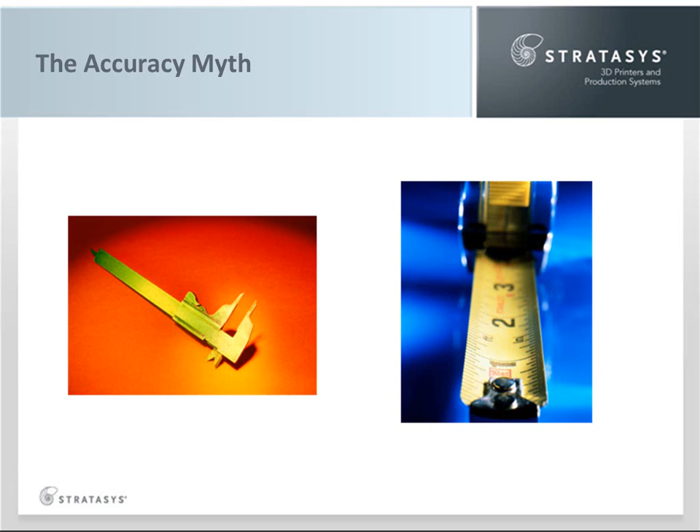Thank you, Fred. As Fred mentioned, I'm Bonnie Meyer. I've been an application engineer for 11 years. Speaking from experience, I've seen the accuracy myth in action more times than I can count. But myth may be a bit strong. Let's say accuracy misconception. The misconception is that accuracy can be determined through unrelated factors like resolution and layer thickness, and that additive manufacturing part quality is linked to appearance. I will spend a few moments today to correct the misconception, to dispel the myth and shed some light on the truth.

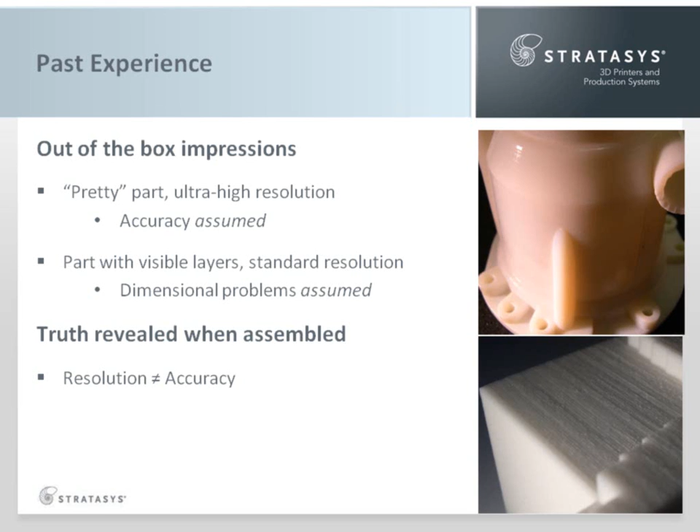A part with visible layers, throw the calipers on the part and start looking for dimensional inaccuracies, fully expecting to find that the part doesn't meet specifications. It's not until they assemble the parts they discover the true accuracy. They learn once again that appearance and resolution have little bearing on accuracy. If it did, the engineering scale on the right would be the more accurate of the two.

The accuracy of the ruler is directly related to how close the overall length is to the specified dimension, in this case 12 inches. The same is true in additive manufacturing. The accuracy of a part is a result of how close the part is to the specified dimension, not how many layers make up a given feature or distance.

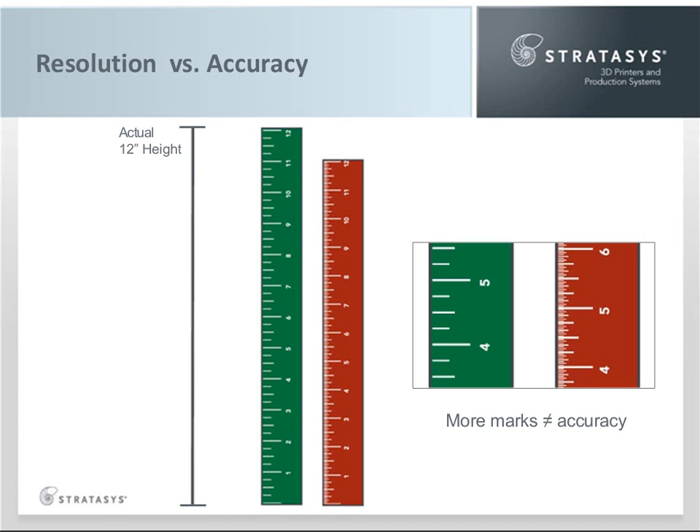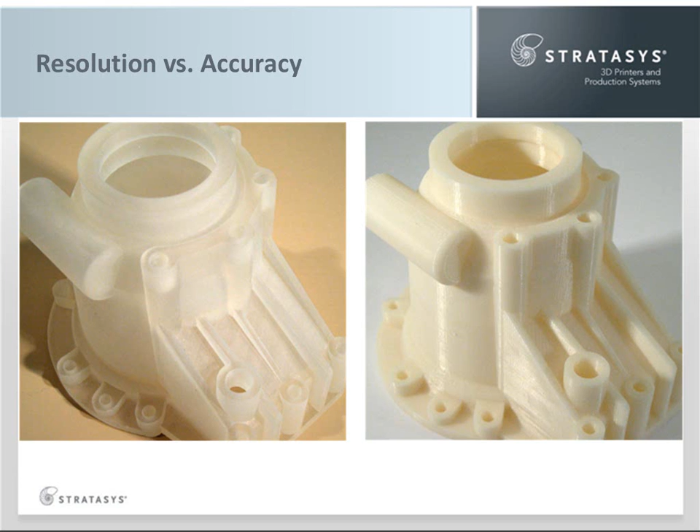To show the disconnect between accuracy and resolution in the additive manufacturing industry, consider these two parts. Which is more accurate, the one on the left or the one on the right? Let's take a closer look. It's impossible to tell, right? If we're honest with ourselves, we'd have to admit that we tend to let the myth stand. A little later, we'll see the answer.

The additive manufacturing industry is filled with accuracy claims. Many are unsubstantiated. Some will lead those that are misinformed to believe that 600 dpi XY resolution or a 5 thousandths of an inch spot size correlates to exceptional accuracy. This is simply not true, as I will prove with hard data from exhaustive analysis.

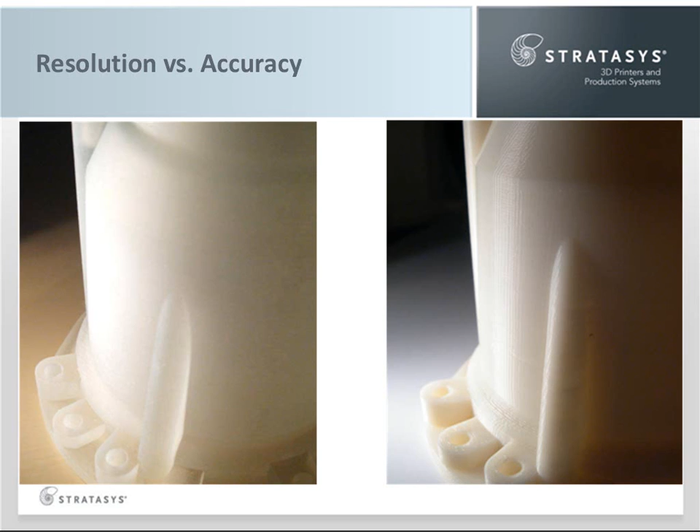Let's take a moment to do a quick overview of some terms. Resolution specifies the smallest feature that a system will reproduce. For additive manufacturing, there are two types of resolution. The first is in the XY plane. For a raster process, this is the space between droplets. For a vector process, it's the spot size, or the diameter of a laser beam or the extrusion. The second is in Z, or vertical axis. For all processes, this is the layer thickness.

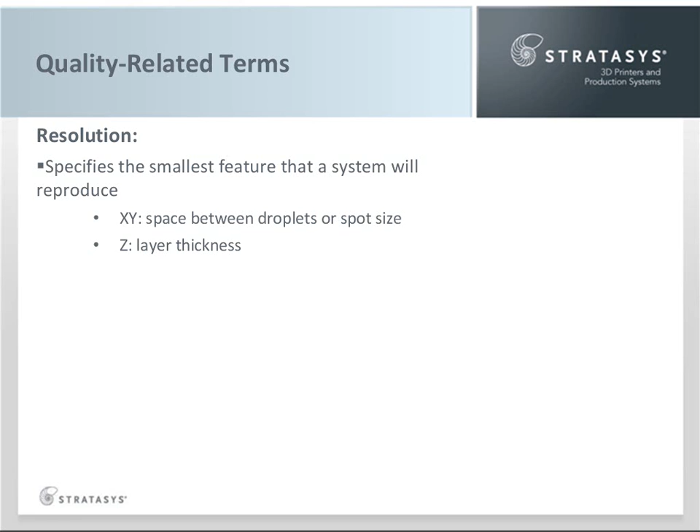Accuracy is how closely a part matches the intended dimensions. Precision is how closely the system gets to its target spot and is often confused with accuracy. And repeatability is the degree of variance between parts. Each of these factors may influence the quality of your additive manufacturing parts. However, resolution only influences accuracy if it results in features that are oversized or omitted.

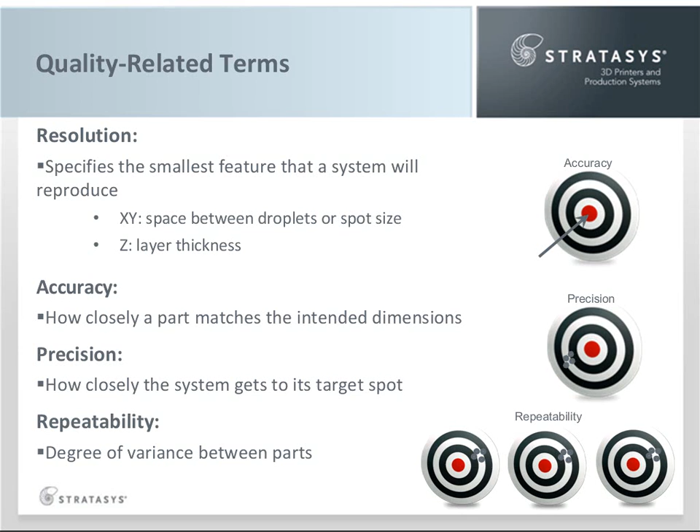And don't forget, quality is always in the context of the application. The application dictates which of these parameters define quality. And there's one other variable that's critical in assessing quality, and that's stability. Stability is the ability to maintain or hold accuracy over time. But we'll go into more of that later.

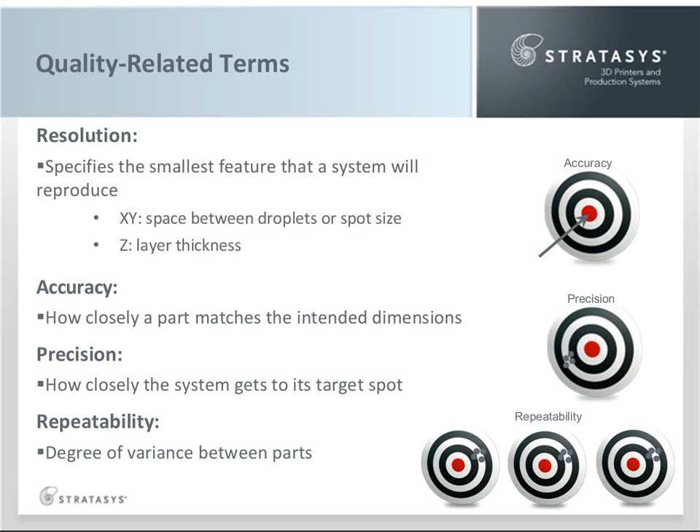So by no means am I discounting the value of resolution. There are applications where it's more important than accuracy, applications where quality is a function of resolution. A few that come to mind are show models, gorgeous pieces painted and decorated to look like a production part. Here, Z resolution or layer thickness can be a factor, for thinner layers produce smoother surfaces, which means less

post-processing. Fine-featured parts are found in jewelry. These are very detailed with fine features that demand a very high resolution, and also tooling or patterns. But really, how frequently is this required for your applications?

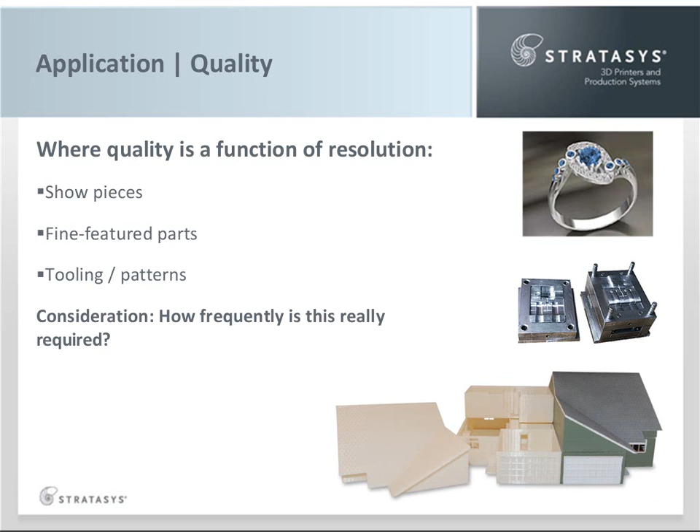For functional prototypes, fixtures, and finished goods, accuracy takes precedence, and that is paired with repeatability when you need more than one. For commercial or industry parts that are routinely injection molded, thermoformed, investment cast, or die cast, for example, product designs tend to avoid tiny features and paper-thin walls.

So in this case, an additive manufacturing technology that replicates features larger than 20 thousandths of an inch will get the job done, as long as it manufactures all those features to the same stringent standards, namely tolerance and repeatability, as the traditional manufacturing process. And those stringent standards are never expressed in dots per inch.

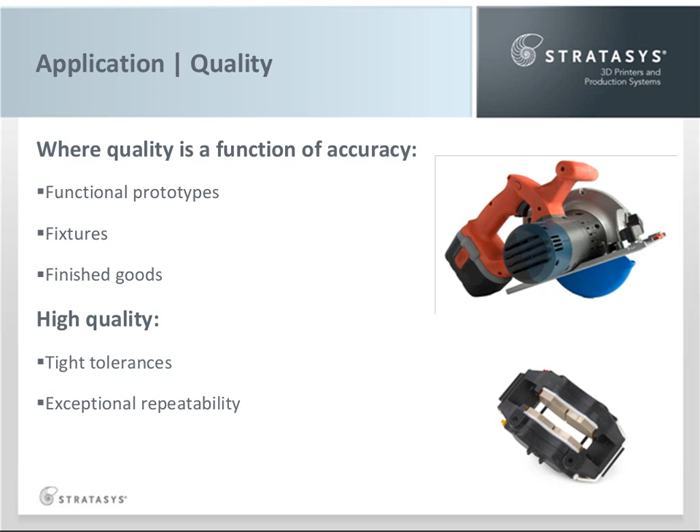A similar myth exists in the inspection or the quality arena. Think back on our 12-inch ruler example. Expand that to a three-dimensional measurement system. One method or tool measures a small number of points, but measures down to, say, 1/10,000th of an inch, while another method may have hundreds or even millions of measurement points, but may only measure to 2/1000th of an inch. In this case, some want to believe that more points mean more accurate measurements.

It's not necessarily true. The accuracy of the measurement device is a result of the device's capabilities, not the number of points it measures. Choose a measurement tool or technique that has an appropriate resolution for your application requirements. In the remainder of this study, we'll use a highly accurate 3D laser scanner to compare different parts.

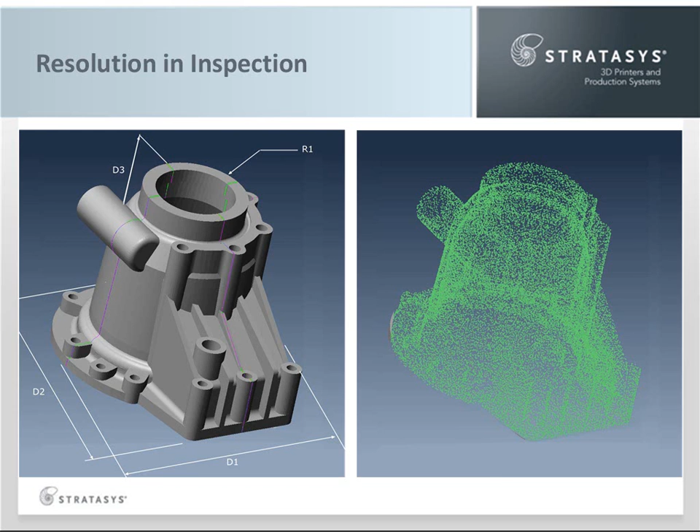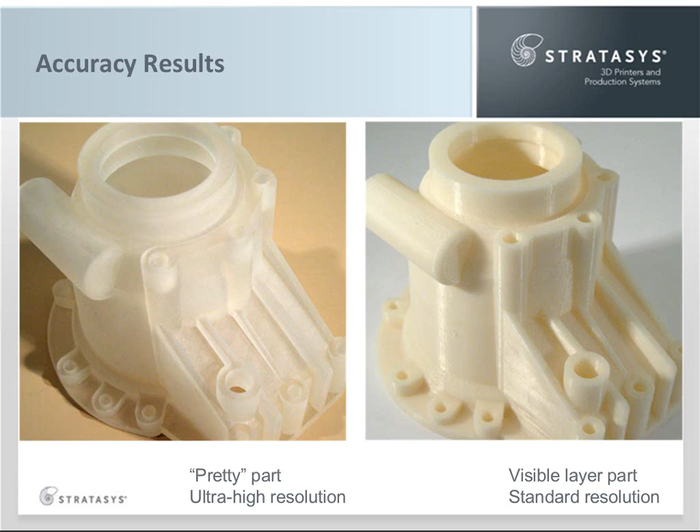So back to the housing we saw earlier. You tell me which is more accurate, the one on the left with 600 dpi and 1.5 thousandths layers, or the one on the right with 10 thousandths inch layers. Take a look at the color maps: 3D scanning data that is color-coded point by point to show how true to the design the additive manufacturing parts are.

The red areas are oversized by 20 thousandths of an inch or more. The purples are undersized by 20 thousandths of an inch or more. The green areas are within plus or minus 5 thousandths of an inch, and the little bit of yellow on the right-hand image is about 7 thousandths of an inch oversized. This is just one example that shows resolution does not equal accuracy.

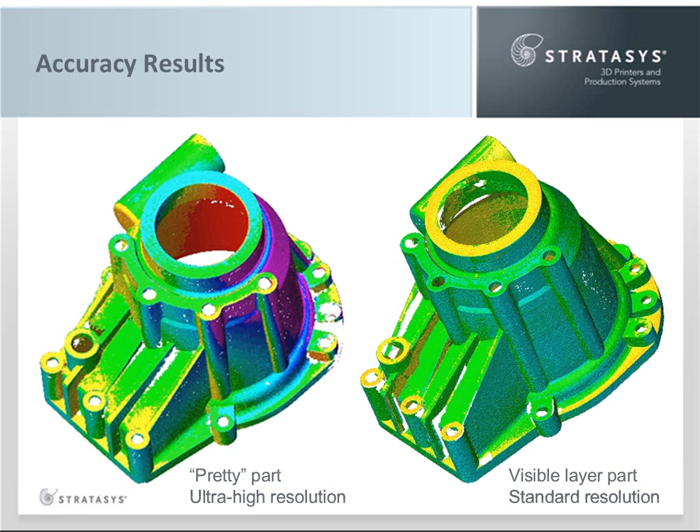As you can guess, the one on the right was printed with fused deposition modeling. But it's from a Stratasys entry-level printer, the uPrint, which is optimized for printing concept models and prototypes. I will show in just a bit the accuracy of the production-oriented Fortus line that is engineered for manufacturing applications. This will be demonstrated by thorough analysis that no others, to my knowledge, have published.

While FDM technology may not be ideal for ultra-high resolution parts like jewelry, it is engineered to meet the stringent accuracy demands of functional prototypes, fixtures, and finished goods. The FDM system resolution: layers from 5 thousandths to 20 thousandths of an inch, and extrusions that produce features as small as 16 thousandths of an inch.

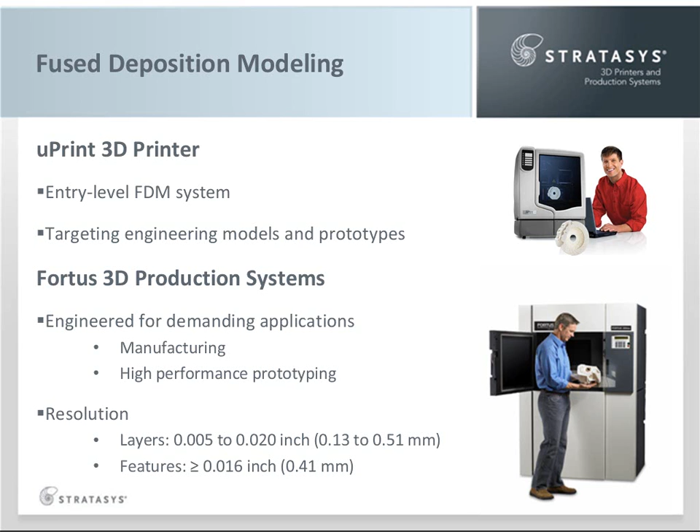For functional prototypes and finished goods, another important consideration is stability, which we defined previously as accuracy over time. Many parts from additive manufacturing systems have service lives that extend beyond hours. With service lives of days, weeks, or even years, the accuracy of the part out of the system is just the start. It's equally critical to evaluate accuracy over time.

Moisture. Some additive manufacturing materials are hygroscopic. They absorb moisture from the air. This may cause the part to swell, warp, or result in mechanical property changes. An example would be a part that is exposed to high humidity environments, like found in many warmer climates of the world. The ambient moisture can cause the part to warp or change shape.

Temperature. Like moisture, heat or cold can alter the dimensions. Not as a function of the coefficient of thermal expansion, but as a result of the release of stresses, or even a low glass transition temperature that causes the part to bow, twist, and warp with modest temperatures. An example might occur when a part is shipped. The extreme temperatures, hot and cold, that the part will be exposed to can potentially warp the part with some technologies that have a lower glass transition or service temperature.

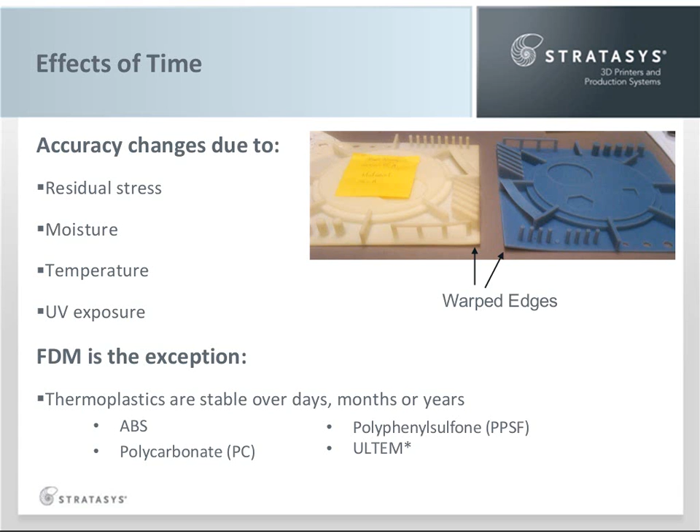Your last consideration when producing more than one part for functional testing or a batch of finished goods is repeatability. It's common knowledge that additive manufacturing processes in general tend to have low repeatability. There's variance between the parts, whether in the same batch due to placement in machines, batch to batch, different runs on a machine, or machine to machine. This is perhaps the most significant obstacle to manufacturing with additive technologies. When making finished goods, process control is critical. Variance between parts, lots, and production facilities is unacceptable.

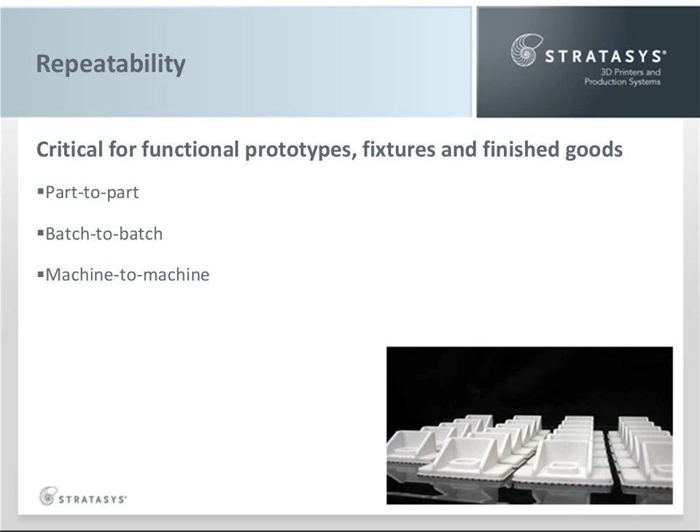But FDM is different, and I have the data to prove it. We conducted extensive studies to determine the process capabilities with analysis of repeatability. Here are the test conditions. Over 100 parts were built and close to 3,000 measurements were taken. Most importantly, no adjustments were made to the machines to dial in the accuracy. But in the real world, you would be able to use sample values as guidance to adjust controls or the model to hit target values. To do this, though, the process must be repeatable. Here's what we found.

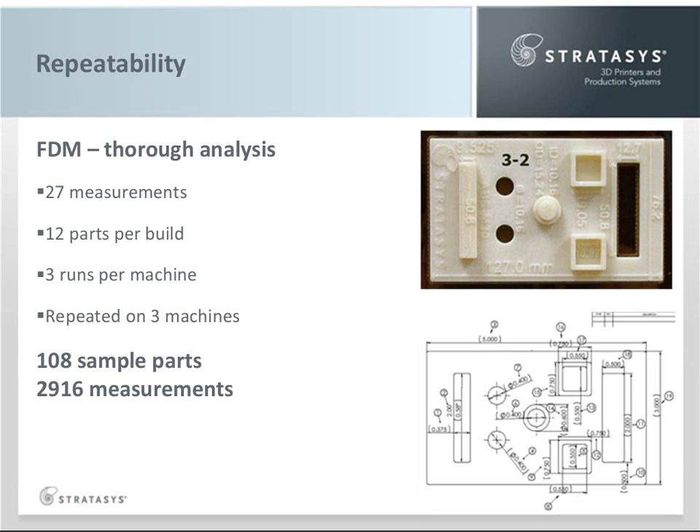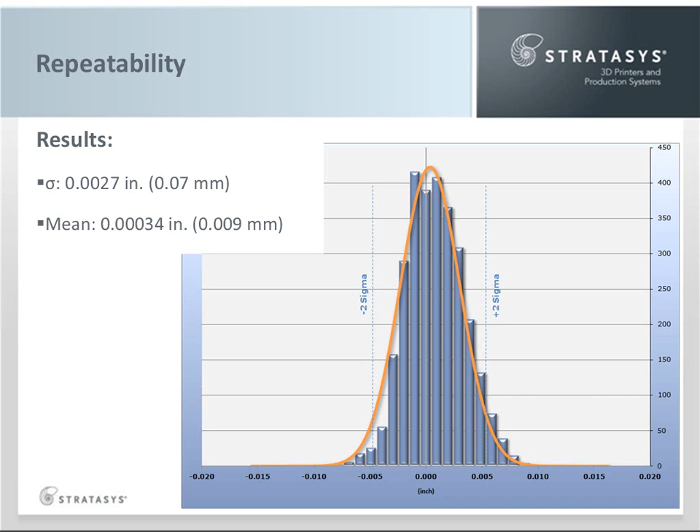In the language of quality control, we had a standard deviation of only 27 ten-thousandths of an inch, centered on a mean of 34 100,000ths. You can see in this histogram, that means the vast majority of dimensions fell within minus 2,000ths to plus 3,000ths. For those who don't usually look at repeatability this way, a normal distribution curve that's high, tight, and centered on zero is what you want. And this is what we have. To look at it another way, 80% of all dimensions were within plus or minus 3,000ths of an inch, and 95% were within plus or minus 5,000ths of an inch.

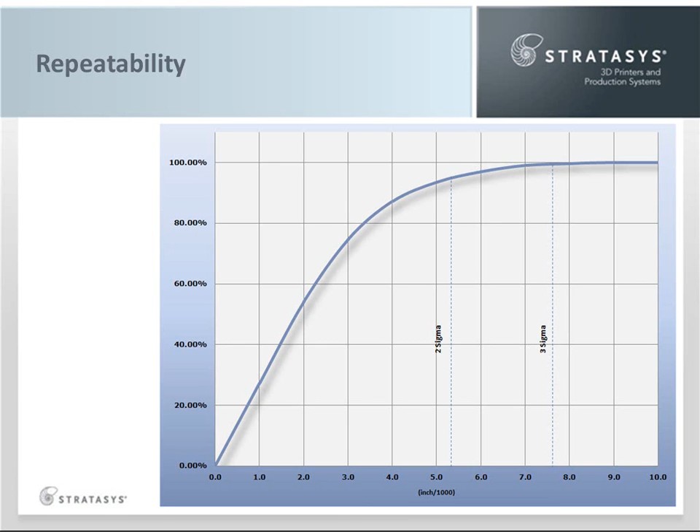I think you'll agree that this is proof that FDM delivers accurate parts with predictable results and very high repeatability. Others may claim it. Stratasys invested in the study to prove that FDM can be your alternative for finished goods manufacturing. And to prove stability over time, we dug out the sample parts from the study, which were just tossed in a box, to take a few measurements. The results are shown here, and as you can see, there was very little change over time. The results show that FDM is accurate, predictable, and repeatable.

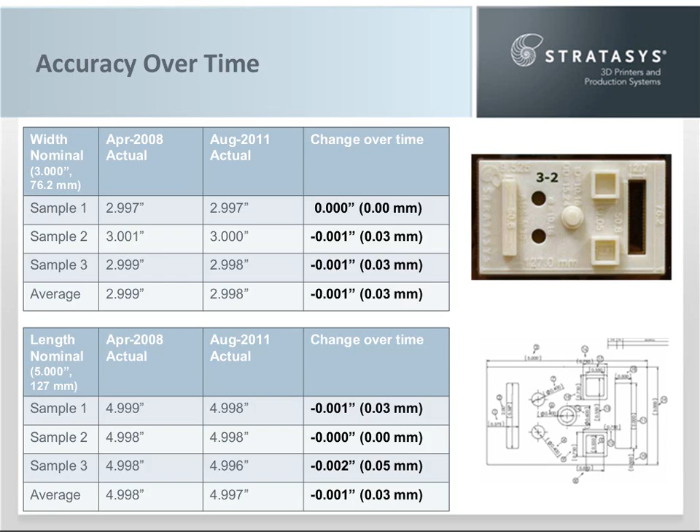I hope I've given you enough proof to dispel the accuracy myth, enough proof to show that resolution does not always translate to accuracy. And stability of the part is often dependent on the material used to produce your part. I also hope that if confronted with a resolution or accuracy claim, you'll ask for proof. If you're conducting a thorough system review, measure when you receive the part and measure it over time. And I suggest 3D scanning or color mapping or another high-resolution measurement technique. Get the whole picture, every feature, every aspect of dimensional accuracy.

And finally, maybe most important, work with your teams to determine what your true wants versus needs are when considering an additive manufacturing part or system. We generally find those that are the most satisfied with their technology choice, both initially and in the long term, are those who purchase based not just on their wants, but on the real needs of their application.

All right, Bonnie, excellent advice and content.

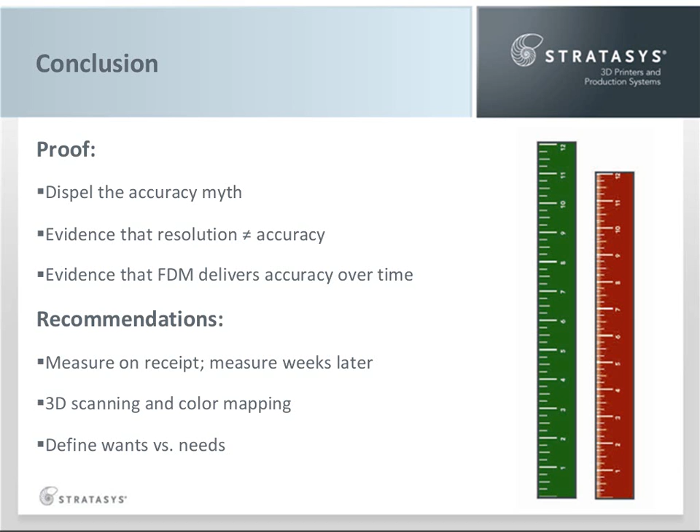All right, well, it looks like during the presentation we had a couple questions come in, and I'd like to take some of these now. Let's look at the first one. It looks like Todd asks, as an operator of an RP system, are there ways to improve accuracy on the actual output?

Well, that depends on the technology and the type of system you have. In general, 3D printers are a lower cost, and they're optimized for ease of use. So the user is not going to be exposed to quite as many parameters to adjust the accuracy. 3D production systems in general are optimized for higher requirements, so the user would be exposed to more controls and more features and more likely to dial in their accuracy. Okay, good. All right, interesting.

Looks like we have another one from Carl. He asks that the accuracy that you outlined seems great for the test parts and the examples, but is it really going to hold true for my part and my application, if not in a controlled environment?

Well, that's a good question, and one we receive quite a bit. We always recommend that you build a benchmark, build one of your parts on the technologies you're looking at, and test their claims. There's no better way to see if their claims hold true than to build one of your parts and see for yourself. Okay, good. That's some good questions. Let's keep these coming in.